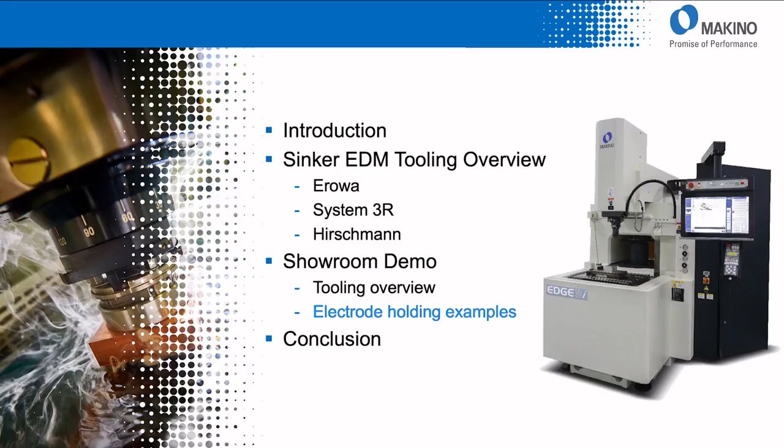Once we do the presentation, we're going to go to the showroom and show some tooling overview, some tool changes, and some holding examples of all three systems on the showroom floor. Right now, I'm going to turn it over to Dave Robinson, our EDM team leader at Makino, who's going to go through and give us some technical details on all of this tooling.

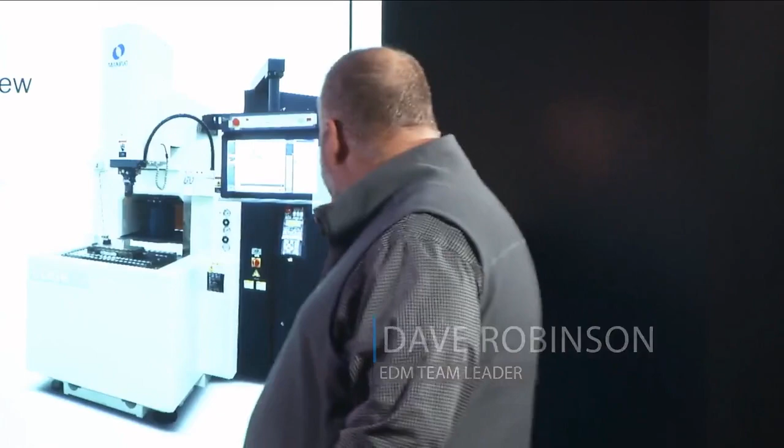Thanks, Brian. As Brian said, I'm Dave Robinson, the EDM team leader here in Auburn Hills. So what we're going to go over today is the three different OEMs we use as far as sinker tooling, and then some of the unique features and unique holding types for electrodes with each of these three manufacturers. So the first one is Erowa.

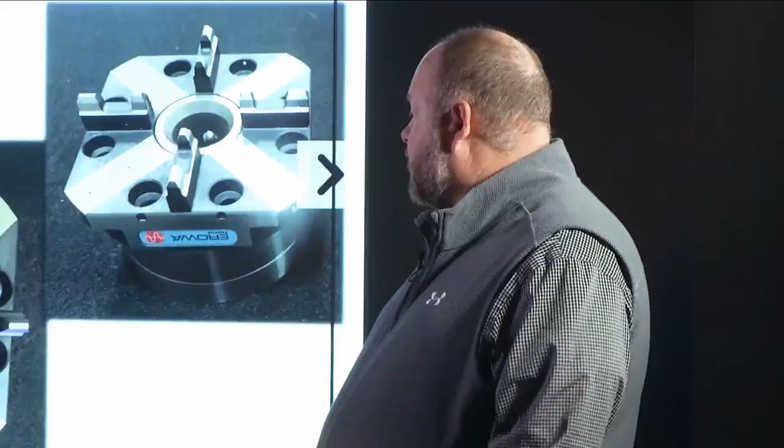So you can see here an ITS chuck. This is one of the primary tooling systems we use on our machines here in Auburn Hills. You can see the Erowa style chuck - this is the Erowa ITS chucking system. They also have some other styles they call compact, which is a little different than the ITS.

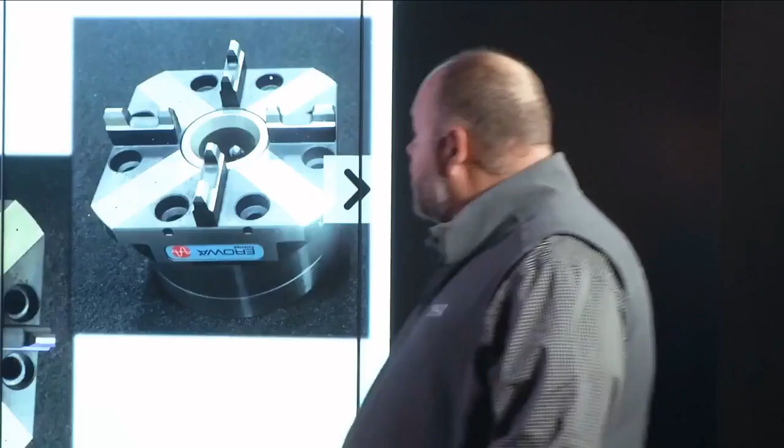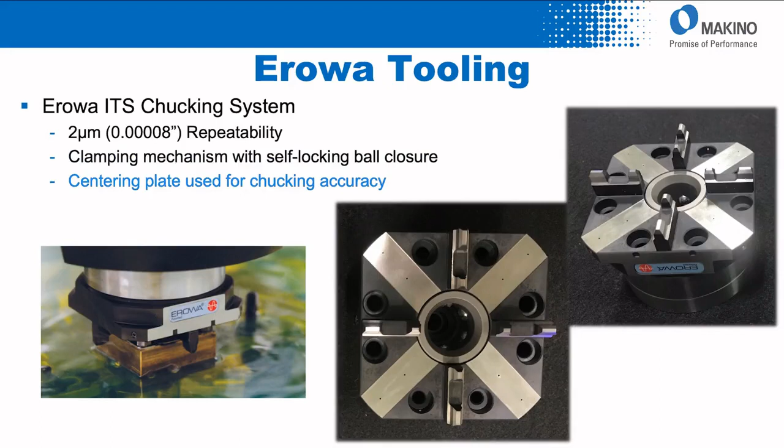As far as repeatability goes, it's very, very repeatable - 2 micron repeatability on the Erowa ITS system. It has a clamping mechanism with a self-locking ball closure system, and uses a centering plate for its chucking accuracy. That's where that 2 micron repeatability comes from, that centering plate unique to Erowa tooling.

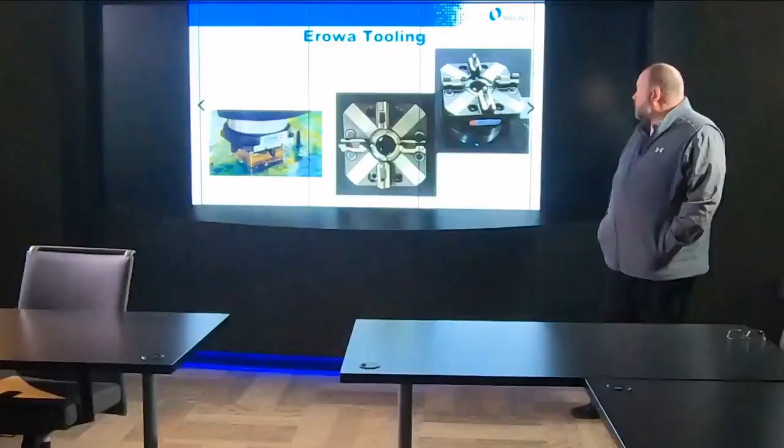So you can see here, this is the compact version. This chuck will accept the ITS, and also the internal center will accept the compact side of it. So this is a two-fold style chuck - a very nice system to have both.

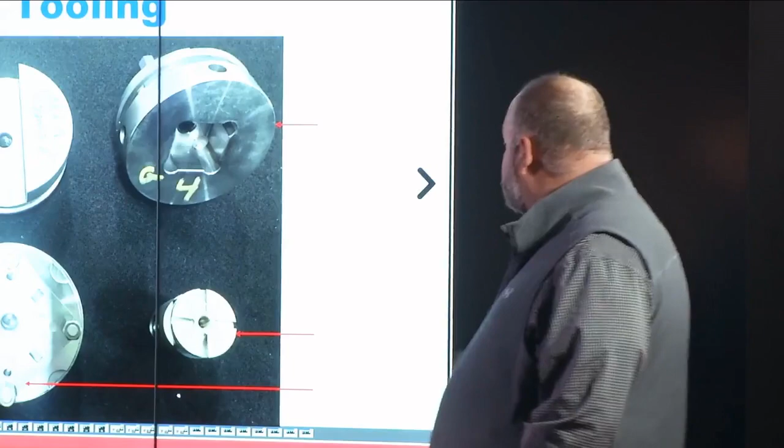And here's some of the Erowa tooling hold systems, some different types of electrodes. So the first one in the bottom center there, this is what we call the reference plate.

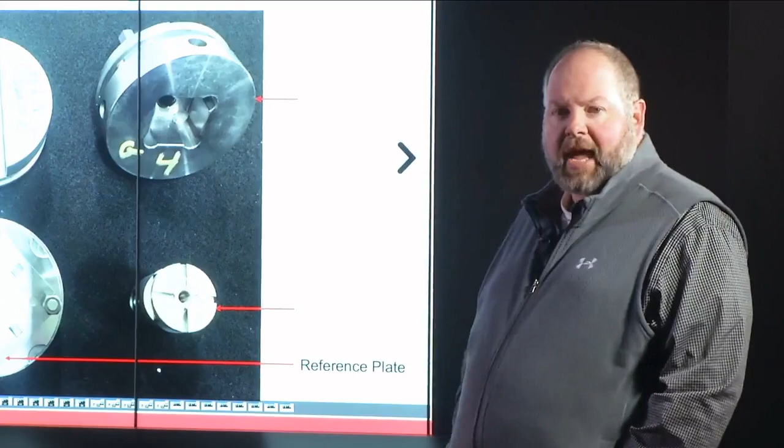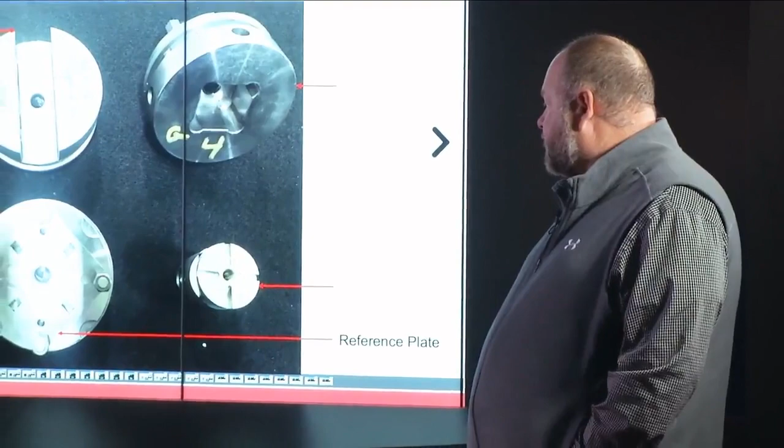The reference plate is what is used to center that in the chucking mechanism itself on the sinker - this is its locating feature. These centering plates can be used to create custom electrode holders with the Erowa ITS system, or this is what's used for centering on all of the standard systems.

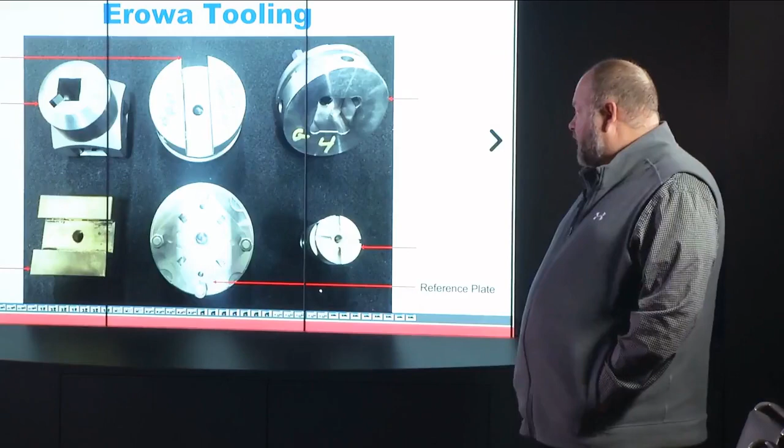Bottom left corner, this is what we call a uniholder. These uniholders could be flat, or they could have a slot in them. The customer could mill their own shape or create a shape in there. These are a very common system, what we call a 50 or 50C.

Upper left, this is a square holder, basically used to hold 15 millimeter square electrodes. It uses a pushing system, so it pushes from the corner to lock the electrode in place.

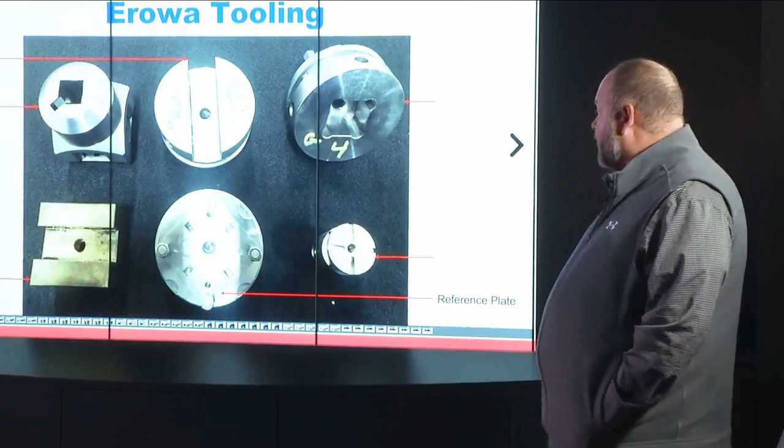Next, top center, the ITS slotted holder. This is a 72 millimeter stainless holding system - very nice system.

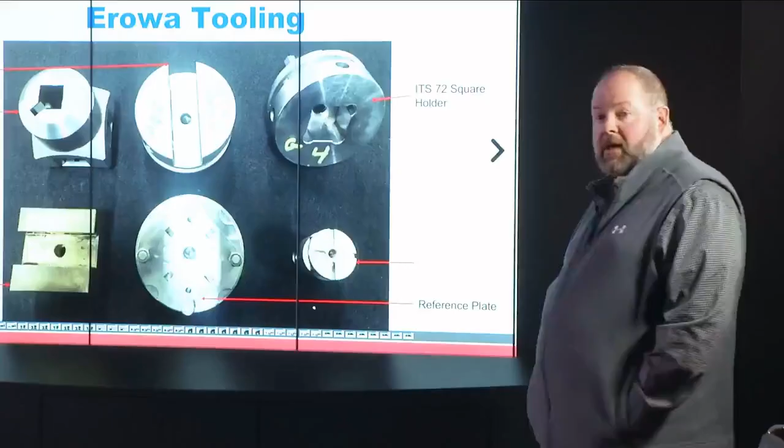Next, in the upper right corner, the ITS 72 square - also a 72 millimeter electrode holder. It uses a square, and then uses set screws to push that electrode blank into each of the sidewalls, almost like a V-block style holding system.

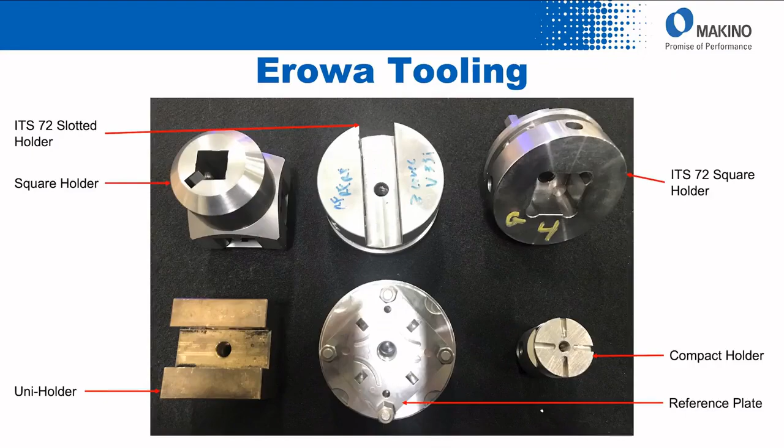Bottom right corner, this is our compact holder, the smaller version - you can see the slots in the top of the electrode holder. This is the locating, a little different than using the centering plate. It uses a centering plate feature that's built into the electrode holder, into the compact holder.

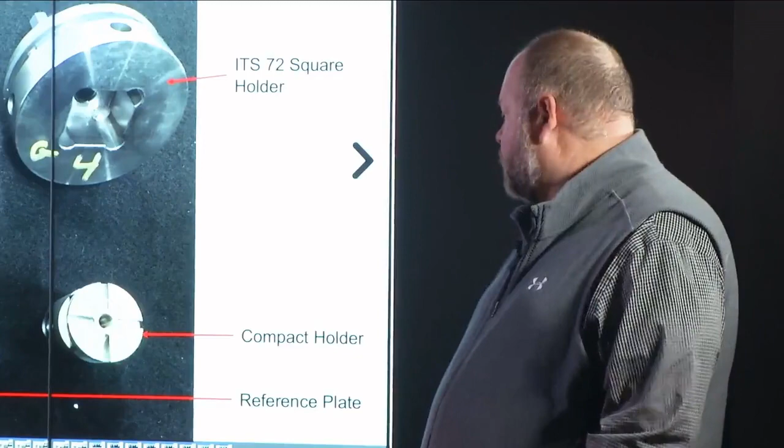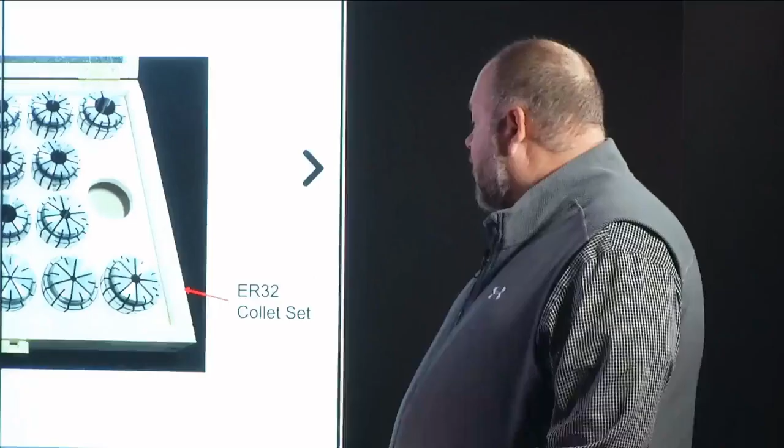So one of the last ones we want to show you, this is a collet holding system. It uses an ER32 collet system - you can see the collet up inside of the collet nut, and on the right hand side there's a collet set. This is the ER32 size collet set. You can also get these in 16 millimeter and even smaller size collets, so it's a very, very flexible holding system for round parts.

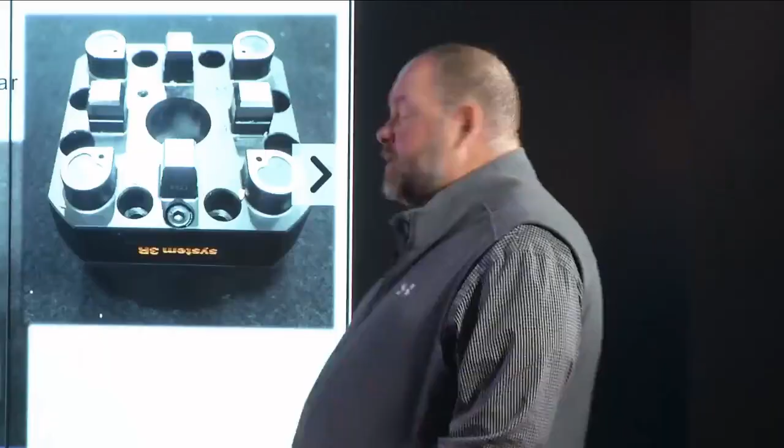It uses X and Y references made of cemented carbide to prevent wear to those locating systems. With Makino, we buy the System3R chuck, this macro chuck with those cemented carbides instead of steel to prevent that wear. That's something unique to the Makino system, that we purchase a very high-end chuck to put on the machine from System3R.

One of the nice features of the System3R macro is a reference pallet that locates directly on a single plane.

Here are some examples of the System3R tooling we want to talk about today, and some unique ones to System3R.

Again, the reference pallet, instead of the plate on the Erowa system. You can see in the bottom center there, this is the reference pallet. You can make custom holders using that reference pallet, and it's used to do the XY centering, and then also the Z locates off that same plate.

Bottom left-hand corner, instead of the compact system, we have a compact combi here on the System3R side. So a smaller style drawbar, but it can be used with the macro system as well.

And then the most common, the macro drawbar. You can see in the bottom right hand corner, standard just macro drawbar.

Square macro holder, so a very commonly used holder for square holding. 1 inch square, this is the square macro holder, upper right corner.

In the center, 20 millimeter shank collet holder. The 20 millimeter system's been around at least 25 years, so a very common holding system in the shop. It uses a collet system in that 20 millimeter shank that goes up into the holder itself.

Our gate holder in the upper left-hand corner is something very unique to 3R. This is a gate holder, so to burn on an angle you can see the small holes in that holder. This will index that holder to set the electrode, or the gate electrode, to a specific angle with a pin. Nice for doing gates that we can set to an angle, without a lot of setup time put into that.

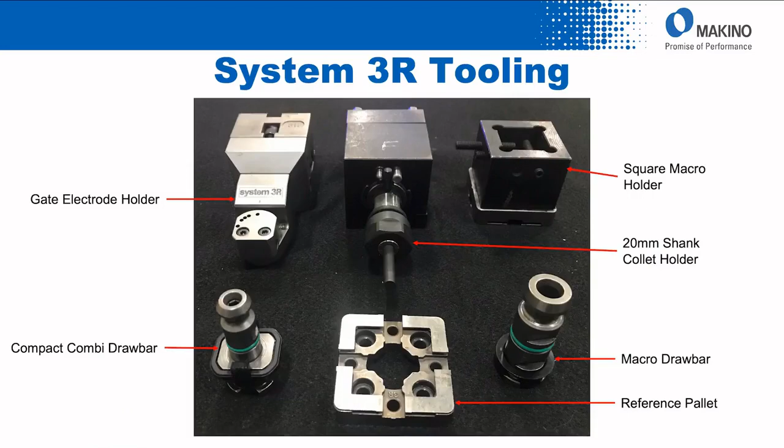Again, 2 micron repeatability, so very, very repeatable. We can take this tool holder from machine to machine, or from the graphite mill or copper milling, right to the sinker, and we have 2 micron repeatability from machine to machine.

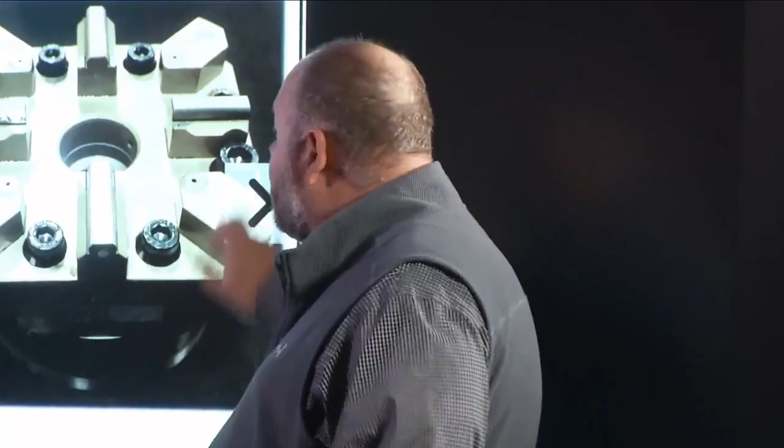This has an integrated X, Y, and Z reference set here, so you can see that on the screen. You can see the Z pads and then the X, Y locating systems on the System 5000 chuck.

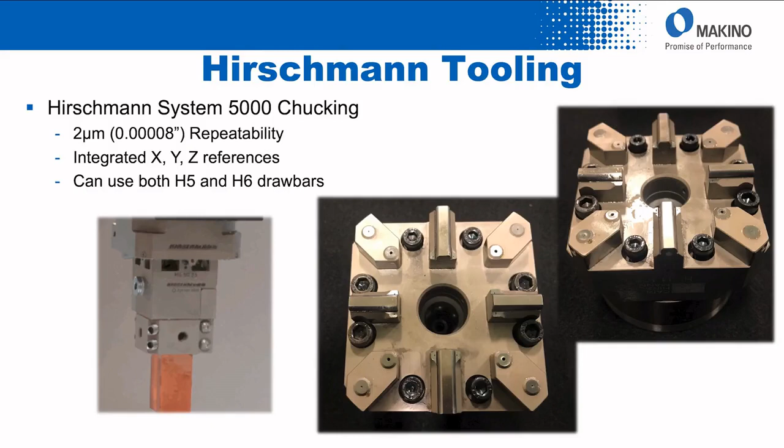With this, we can use both the H5 and H6 drawbars. There's a difference in height between the H5 and the H6, and you'll see that in the next couple slides.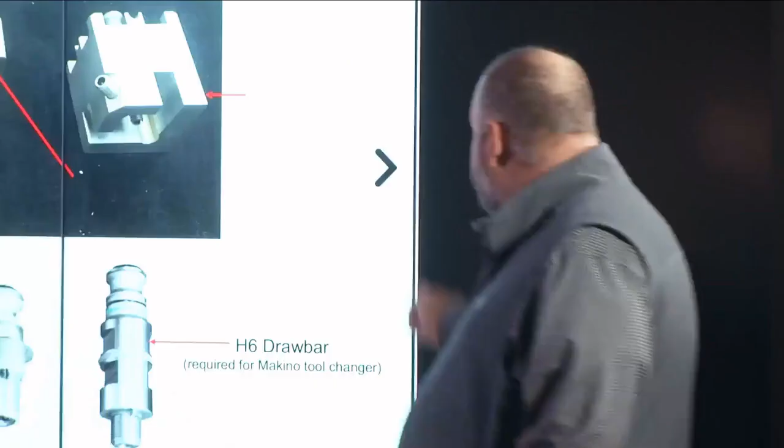Again, reference pallet. The middle right there is the reference pallet, and these can be used to make custom electrode holders.

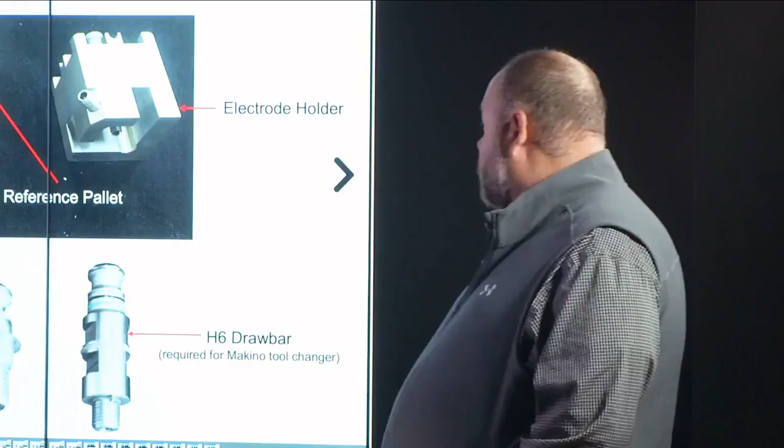Upper right, this is one of their standard electrode holders, and it has the H6 drawbar inside of it. We can do square around with this and use a set screw to push that into the corner.

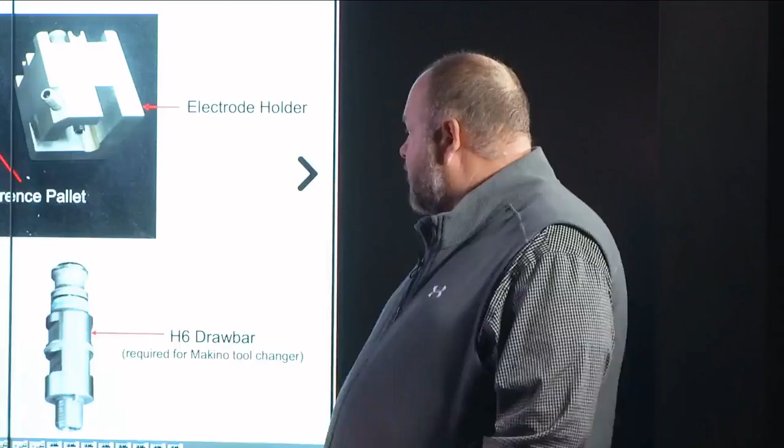One of the nice features with the Hirschmann extension holder is they have many styles of extension holders, and they get longer as you go. These are nice to get down into deep areas on the molding side, where we can put the electrode on that shank and get into that deep area.

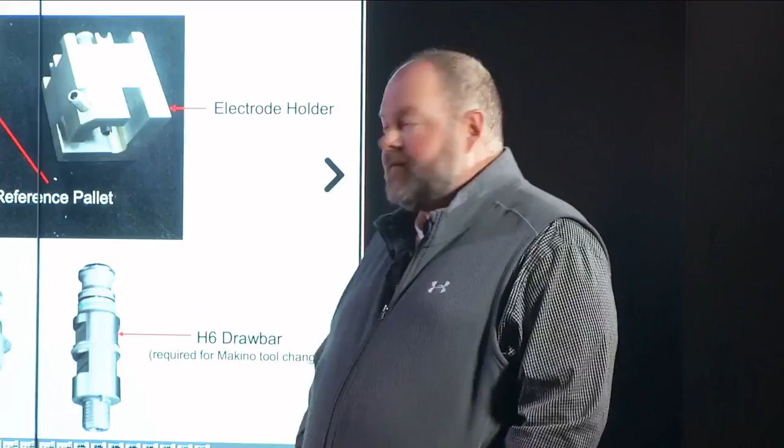And then the last one in the upper left corner, just a standard electrode holder. We mounted a 50 millimeter, or 2-inch, graphite square there. It's been milled in the electrode machine.

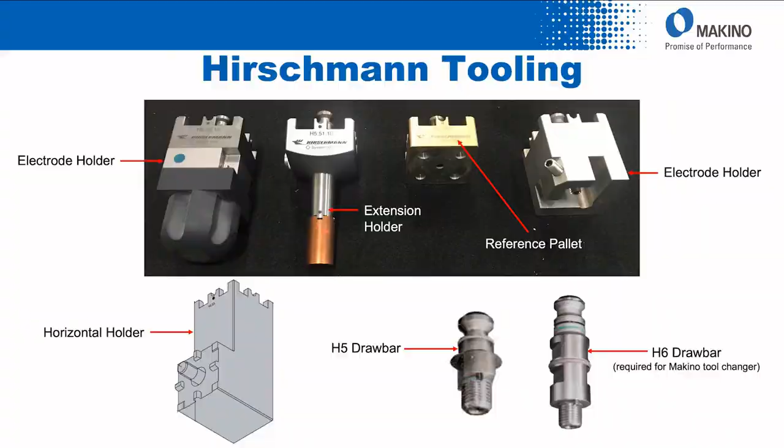And then bottom left, another unique feature for the Hirschmann side is their horizontal holder. We can take any of those standard electrode holders and turn that horizontally, basically 90 degrees, and use that to burn sideways. This minimizes your setup time, since we can go 90 degrees without changing the setup.

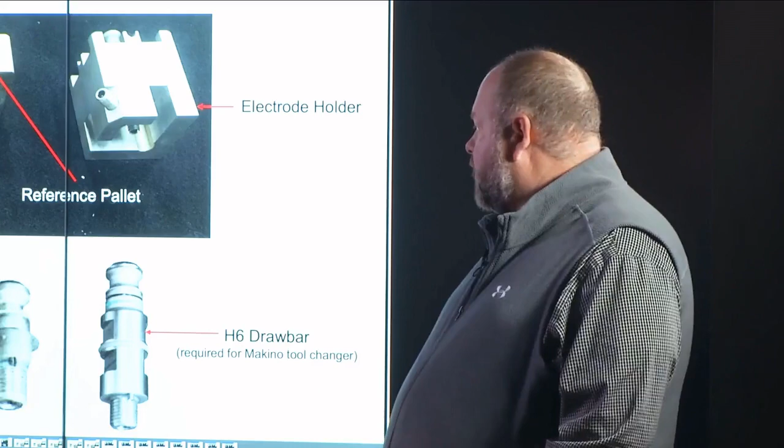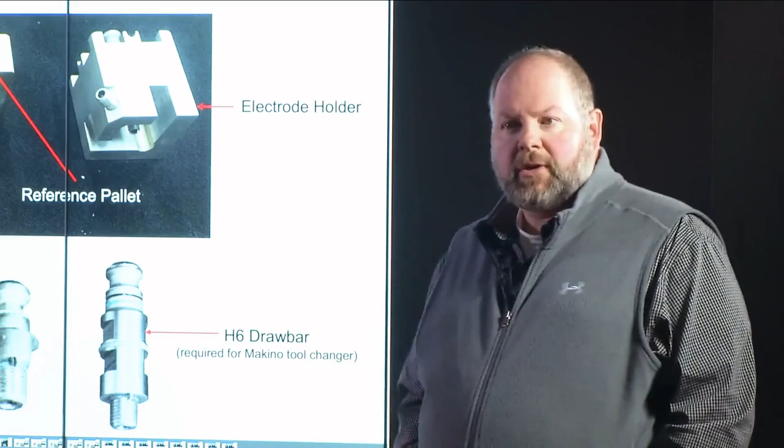So that's all the examples we have today. We're going to go ahead and now go out to the showroom, do some tool changes for you, and show you how these electrode holders interface with the Makino ATC on our sinkers.

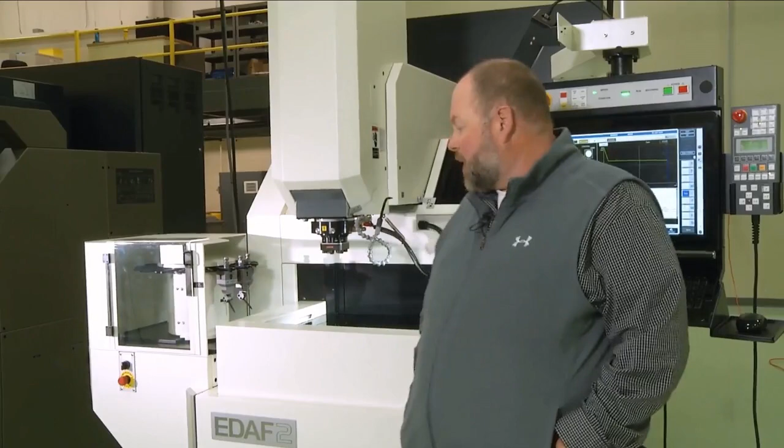All right, we're now out at the showroom, and what we want to show you now is our EDAF2 high precision sinker. This has the 3R, or System3R, macro chuck on it. So what we wanted to show you is the gate holder that we had shown in the presentation, and how it comes in off of the ATC, or automatic tool change. I'm going to go ahead and start the tool change for you and talk about the chuck itself and the movements of the tool changer as we go. So we'll go ahead and get started.

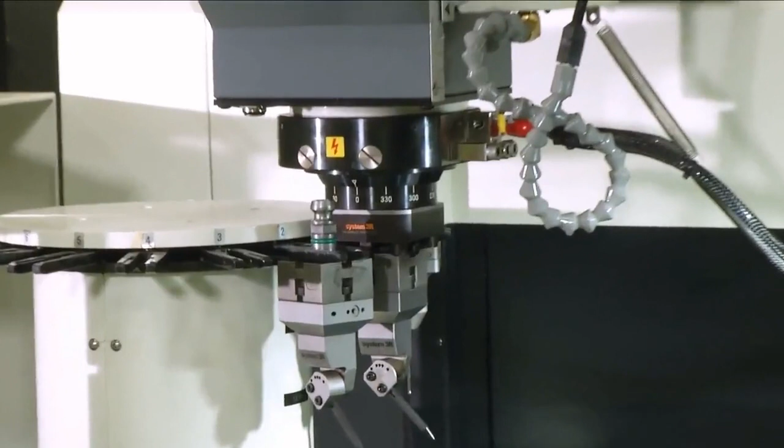With the EDAF2 machine being a drop tank, it's going to drop the tank down to a safe level. Now the System3R chuck does an air blow to check for a tool, comes over to its ATC or automatic tool change position, over top of the drawbar, completes the tool change, and then retracts back into its original location. From there, the machine will raise the tank back to its original level. It also fills the tank, so no operator intervention is needed.

So you can see that 3R macro gate holder, it's now set at a 45-degree angle, and when we go to burn, that electrode is set on that 45-degree angle, and we're going to do what we call a vector burn, moving in a 45-degree movement in the ZX direction. You can see now the machine's jumping, so it's moving in that 45-degree angle. And when the machine's done, it would put the electrode away in the opposite order that it brought it out.

One of the nice features of all of the Makino sinkers is our universal finger. That ATC, or automatic tool change finger, is common between all of the machines. You'll see we're going to do a demo on our EDNC6, which is the medium to large sinker, and then also the Edge 2i, which is our very small footprint sinker, and it has that same universal finger. So we're going to go ahead and now go over to the Edge 2i, and we'll demonstrate the tool change on that as well.

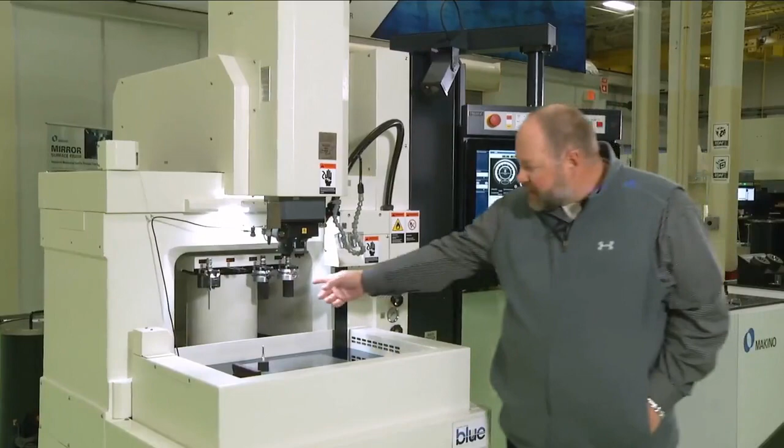Okay, now we're over at the Edge 2i. This is our smaller tool room sinker, really nice small footprint. You can see the ATC on this machine is in a small area in the casting, really nice for space-saving design. This is our 4-station rack. This machine also comes with an 8-station rotary magazine as the EDAF2 did. Right now we're going to show you an automatic tool change on this machine and show you some of the features of the Erowa ITS when we're doing the tool change. So I'm going to go ahead and do a tool change for you.

Just like the EDAF machine, the tank's going to drop to a safe location. In this case, the magazine will come into the work area - a 4-station rack style tool changer. Same air check. And then the magazine slides out of the way. Head clears, tank returns to its original position, and the oil level comes up.

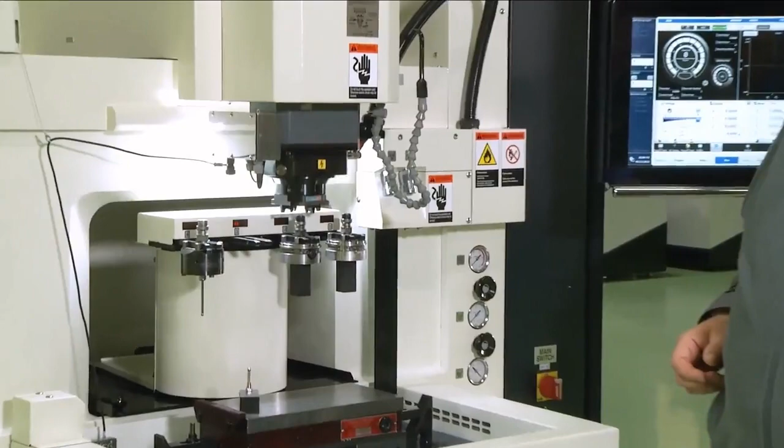So with the Erowa ITS, some nice features there. During the tool change, you saw an air blow, basically a check and to clean the feet. Once the tool change is done, I'll show you on the chuck itself - there's a ground area underneath the Erowa ITS chuck. This is where the feet on the tool itself contact that chuck. That's the Z-axis locator, in conjunction with the XY for that centering plate. Nice feature with that.

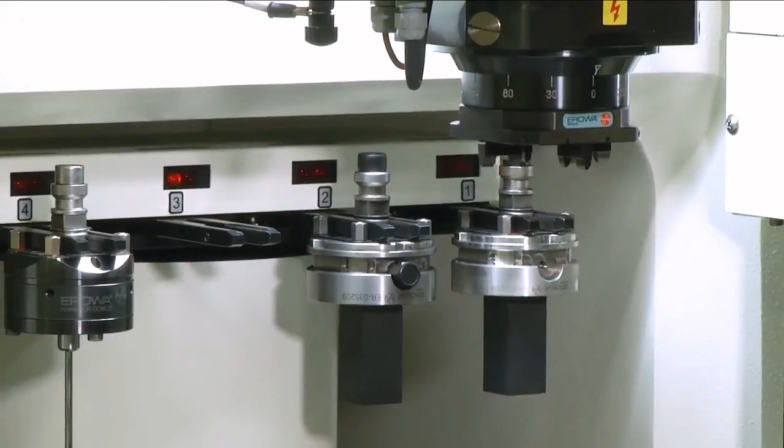Also, this is the ITS 72 millimeter pallet that we had talked about in the presentation. You can see that it contacts the drawbar on the ITS with that universal Makino finger as well. Another feature of the ITS 72 tool holder is it has a pre-machined area, you can see here, with the RFID chip. So if this were in a cell controller or any type of machining situation that uses that RFID, it's already machined into the Erowa ITS 72. Very simple, easy to use tool change system, very safe. You can see the 4-station rack, and here we have one of the Erowa probes. So very small, compact ATC, and it can be changed during machining as well.

So next we're going to go down to the EDNC6. We'll take a walk down there and I'll show you that tool change as well.

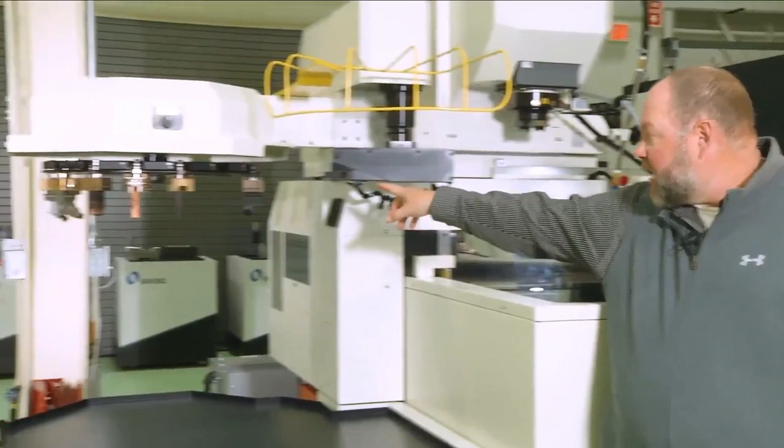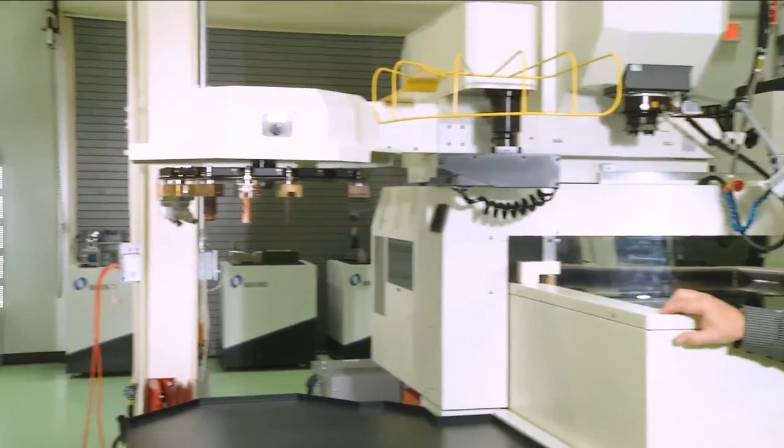Okay, now we're here over at the EDNC6, our third and final machine today. This also has the Erowa ITS chuck on it. The tool changer is a little different here - this is a 16-station tool changer that uses a transfer arm to bring our Erowa ITS tools over. You can see we have a good mix of the ITS 72, the 50 millimeter slotted pallets, and a couple gate holders as well.

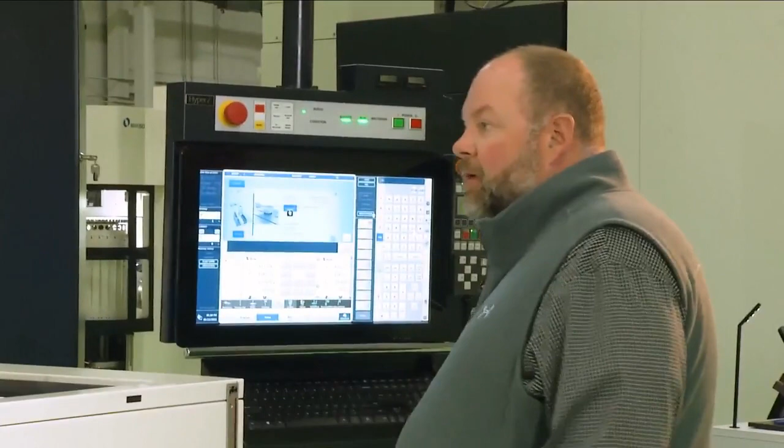I'm going to go ahead and show you a tool change on this EDNC6. Similar to the other two machines, we're using that same universal finger, but we use the transfer arm to go in and grab the tool by that ITS drawbar up top. We rotate over, arm extends out, head comes down, doing that air pressure check now. You can see the contact with the Erowa feet for our Z-axis locating position. One thing you'll notice, when the transfer arm did the change, it went up at a 45-degree angle to clear the tank wall for long electrodes. Then when it goes back, it comes back flat.

So now we're going in to do a burn. This machine, the EDNC6, has a high-speed head, or HS rib head. It's capable of a 20-meter jump on its jump speed, or retract jump. So when it first contacts the steel, you'll see that 20-meter jump - that very, very rapid jump as the machine burns. The other smaller machines have a 5-meter jump, like the Edge 2i. This is that 20-meter jump - HS rib, the high-speed rib machining capability.

That completes our presentation out here in the showroom. I'm going to go ahead and head back into the EC Center with Brian Coward, and we're going to field questions from the chat. I'll meet you back in the EC Center. Thank you.